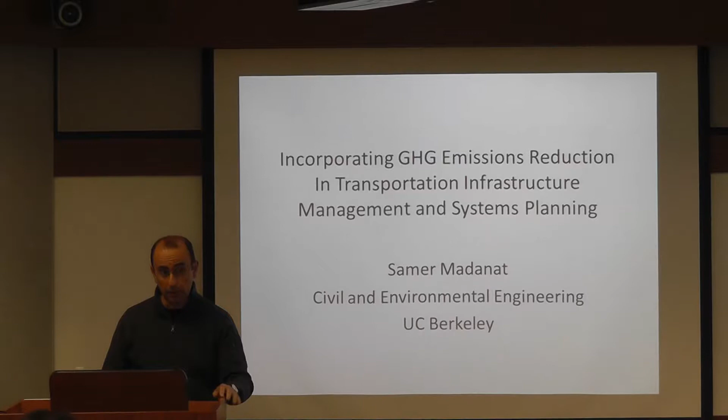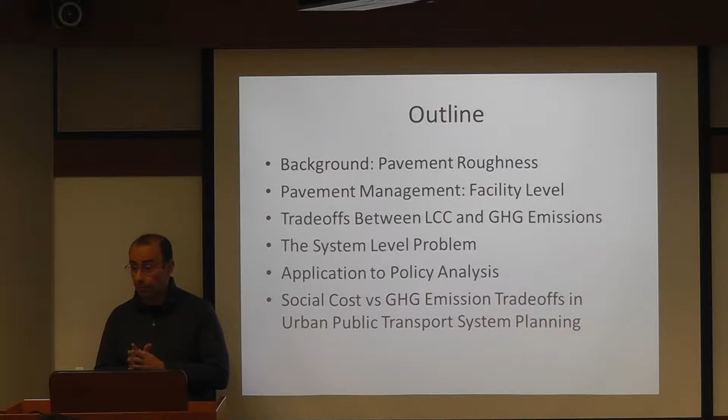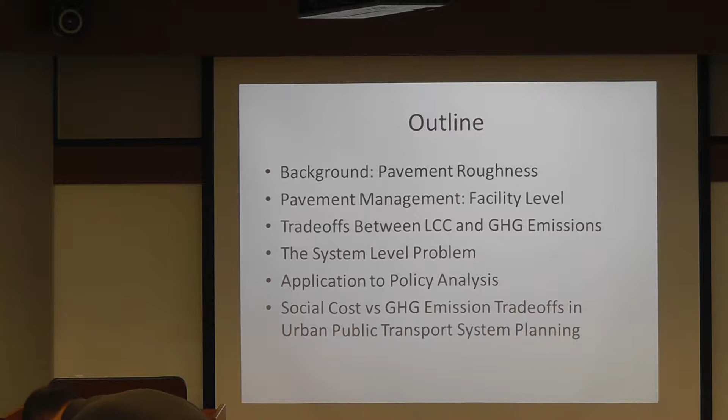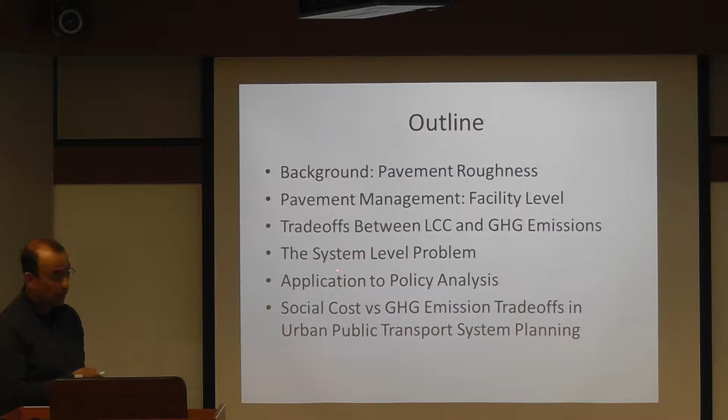This is research, first of all, that is with several co-authors. It's a series of dissertations and journal papers. The focus of the first part is on the incorporation of greenhouse gas emission reduction objectives in the context of pavement management, and specifically reducing pavement roughness. So I'll talk about this first at the conceptual level. I'll introduce the simple problem, which is at the facility level. And then I'll introduce the more realistic problem, which is at the system level, to discuss how this framework and methodology we've developed can be used for policy analysis. And then, if I have time, I'll show the equivalent problem in the planning of urban public transportation systems.

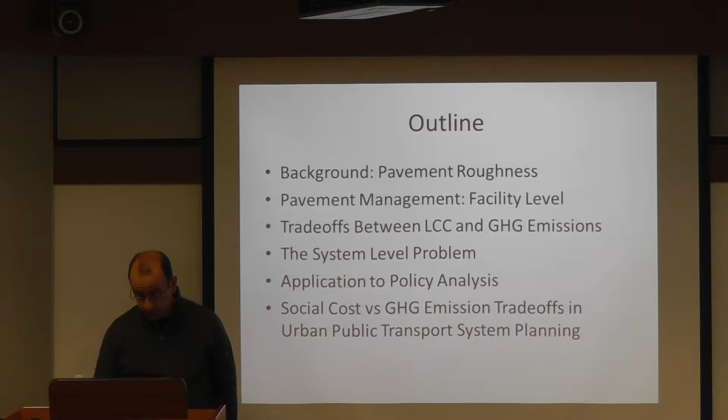So the motivation. I think this is an audience that knows a lot about concerns about greenhouse gas emissions. California is at the forefront of the states in this country in trying to take very serious steps toward reducing its greenhouse gas emissions. We've had over the past decade the California Assembly Bill 32, which calls for reducing greenhouse gas emissions in California by 2020 back to its 1990 levels. And the governor issued an executive order to take that law and expedite it.

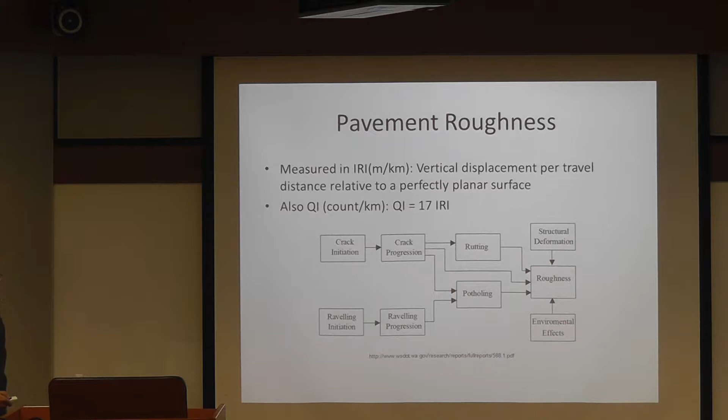Now, roughness is also very important because it is a major driver of vehicle operating costs. By this we mean both wear and tear of vehicles and fuel consumption. So for most state agencies in the US and many countries, what they use to drive their pavement management is often the increase in roughness.

And so in a very simplistic type of pavement management system, you have two possible alternatives. Doing nothing, which leads to an increase in rolling resistance, fuel economy goes down, wear and tear goes up, and also, importantly, greenhouse gas emissions go up because of the decrease in fuel economy. These are some of the papers based on which we have developed models that we'll be using in this presentation.

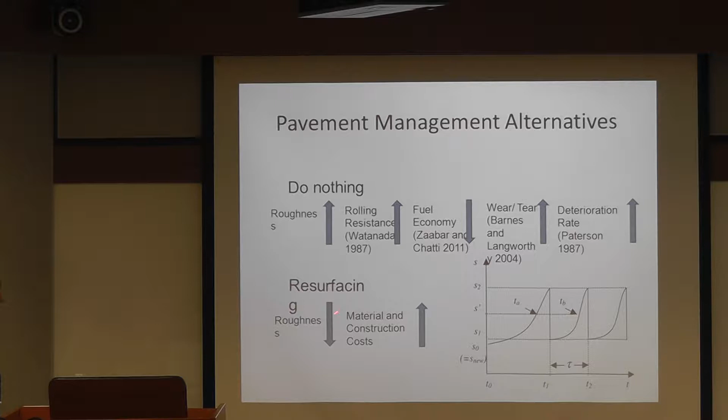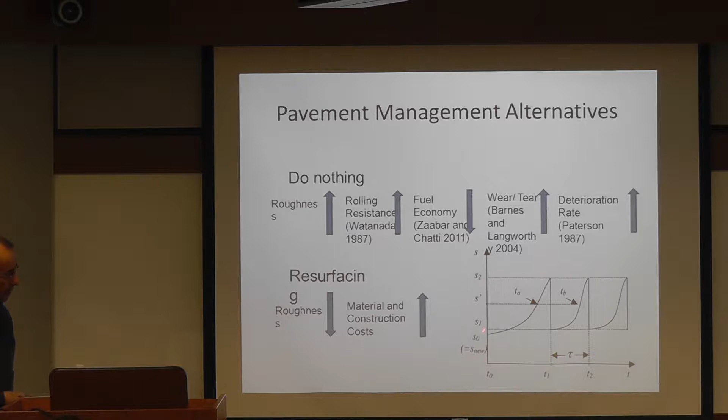If you do resurfacing, roughness goes down, but of course you have an increase in material and construction costs associated with resurfacing. So typically, the succession of roughness progression and resurfacing actions leads to something like a sawtooth curve, which is typical of roughness progression on a typical highway pavement, where T is the time axis and S is roughness as measured by IRI.

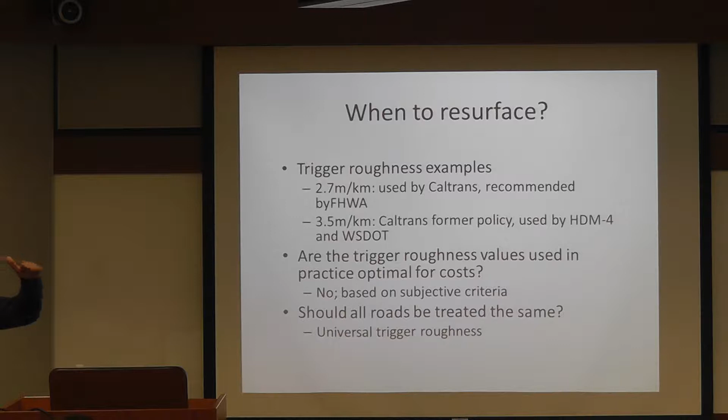The question, of course, therefore, is when to resurface. At which point should we resurface? And most state highway agencies use something that they call the trigger roughness. So that's the point at which, when roughness reaches it, a resurfacing action is applied. In California, that happens to be 2.7 meters per kilometer. Formerly, they used a trigger roughness of 3.5 meters per kilometer. They abandoned it less than a decade ago.

The Washington State DOT, which is another DOT for which we have a lot of data and we've collaborated with, uses 3.5 meters per kilometer. So there are two questions here that one needs to ask. Are these roughness values optimal? Do they represent an optimal trade-off between user cost and agency cost? And the answer is no. They're typically determined on the basis of subjective criteria. Kind of a panel of experts sitting around the room and deciding that this is a good number.

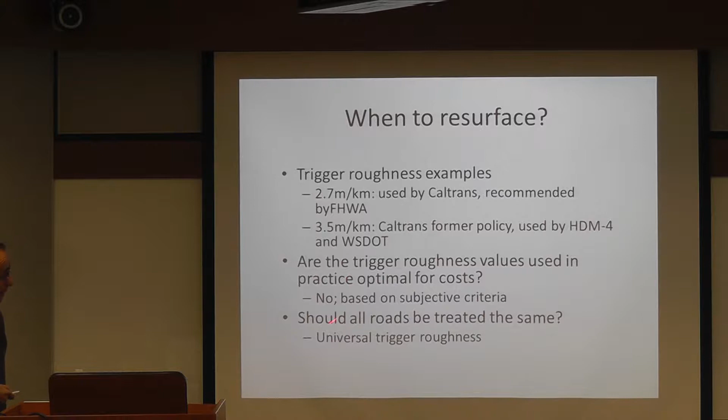The other question is, should you have a single universal trigger roughness for all the pavement segments in your jurisdiction, for example, in the whole state of California? And that is a question worth asking and seeing whether this actually makes sense.

So our research objectives here are to develop the framework for optimizing roadway pavement maintenance, specifically overlays, resurfacing, that would take into account both costs, meaning life cycle costs, including user and agency, and greenhouse gas emissions, coming from both the users and the agency, both at the facility and system levels, and then to use that to do some policy analysis.

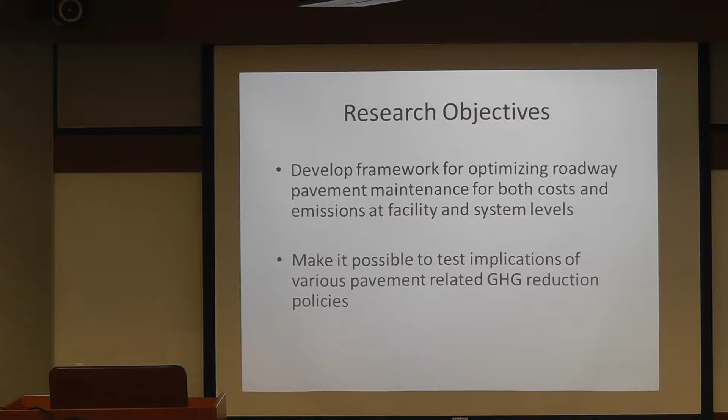So some limitations: to keep this research manageable, and also in view of the limitations of data and models that we have, we're only considering asphalt pavements and overlays. We're not looking at rigid pavements, concrete pavements with overlays. We're excluding minor pavement maintenance activities. These are much smaller in terms of both costs and emissions relative to resurfacing the pavement. We're not looking at end-of-life considerations.

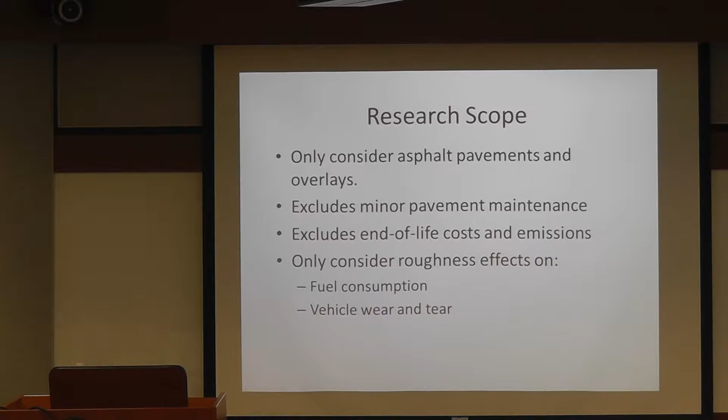And though roughness may have impacts other than fuel consumption and wear and tear, for example, damage to goods, California being an agricultural state, and much of this produce being transported by trucks, obviously rougher roads can lead to situations where you end up with tomato paste instead of tomatoes by the end of the trip and other things like that. We're not looking at that.

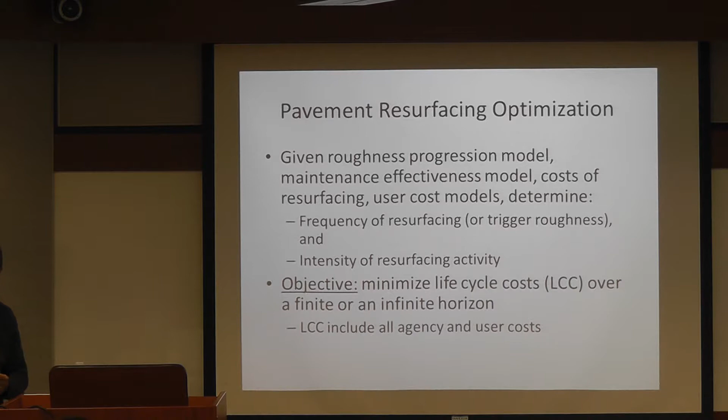The problem is this, so you're interested in determining the S2 here, and S2 could be time varying or could be constant in steady state conditions, and which is the same as determining the time period between this resurfacing and the one before it.

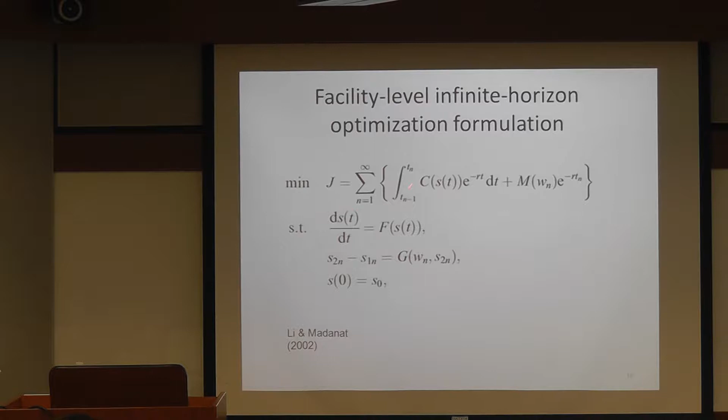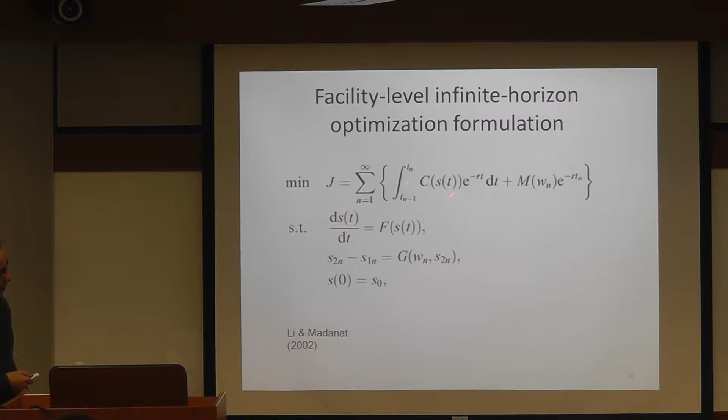So the problem is a formal nonlinear optimization problem where we have the entire life cycle cost. So this is for an infinite planning horizon for a series of cycles, and in each cycle there's a cost associated with the overlay and a cost associated with the users as well. And this is the users rather, and this is the overlay. There's a deterioration function that describes how roughness progresses, some initial conditions and boundary conditions, and

for an infinite planning horizon, not surprisingly, you eventually reach steady state conditions, which means that you have to solve for a single S2. So that kind of trigger policy, which is used by state agencies, turns out to be logical. What state agencies typically will do is they will apply a trigger, except that that trigger is subjective, and whenever they overlay to the maximum possible reduction in roughness.

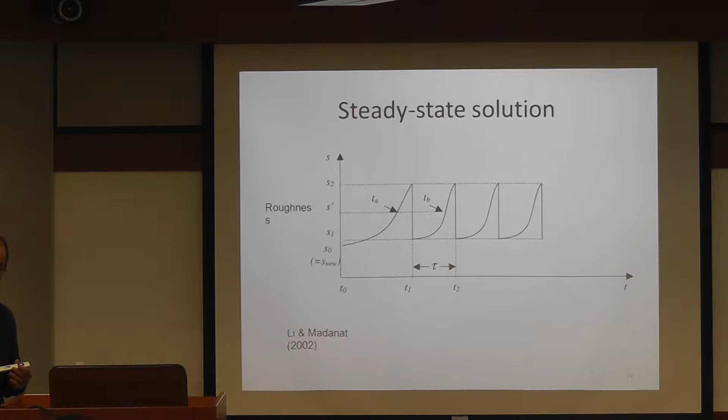So there's a technological upper limit on the size of that drop, because an overlay cannot bring a pavement to as-new conditions. But they apply resurfacing to the maximum possible extent of reduction. I'll skip over this. So we get basically two insights from solving this infinite horizon problem.

The first, which I just described, the optimal strategy is to resurface with fixed intensity whenever pavement condition reaches a specific threshold. And it turns out that this solution is quite robust to deterioration model uncertainty. So solving the problem like I did here deterministically is fine for this particular problem, because you can be off in your prediction by up to 20 or 25% with less than a 5% impact on the optimal solution in terms of cost.

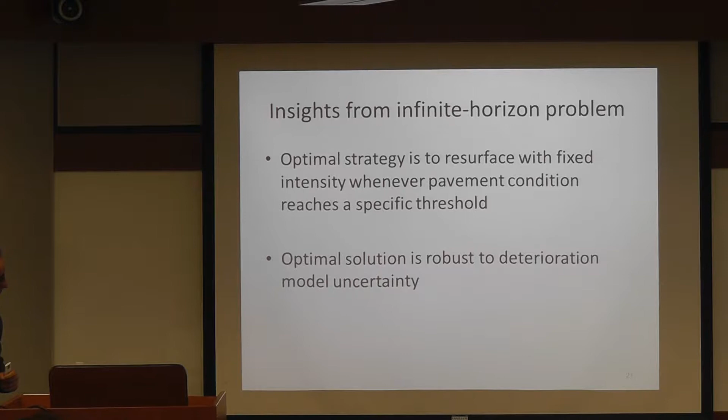There's also an equivalent where we solve the problem for finite planning horizon, and this is described in this paper. And we find essentially the same thing, that we do obtain steady state solution except near the end and the beginning of the planning horizon. And it's always the same kind of trigger roughness policy, the threshold policy here, that says that whenever you reach a trigger roughness, you should do the maximum possible reduction in intensity.

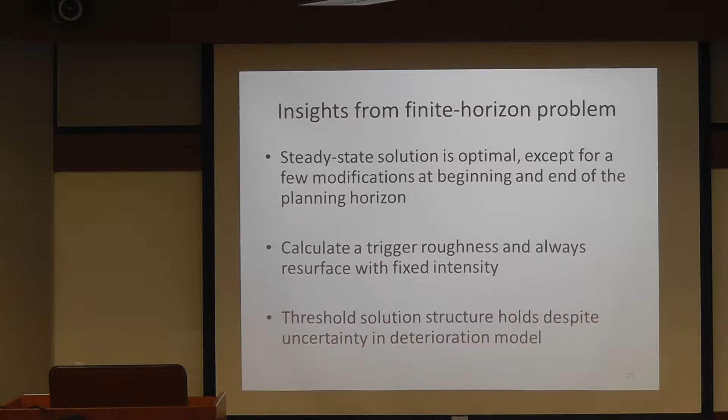So this is called a threshold policy in dynamic programming and optimal control, and this is really what we have. Again, fairly robust to deterioration model uncertainty. All right, so that's what we did in the context of minimizing life cycle cost.

Now let's bring in emissions into the picture. So in the case of emissions, just like that of life cycle cost, there is a trade-off between what happens on the agency side and what happens on the user side. So if we look at overlay intervals here on the x-axis, and CO2 emissions per mile in kilogram per year. As you increase the overlay intervals, the roughness emissions are going to increase. That is, those coming from the users, and that's obvious. Your pavements are rougher for longer, and therefore your vehicle fuel consumption increases and your CO2 emissions increase.

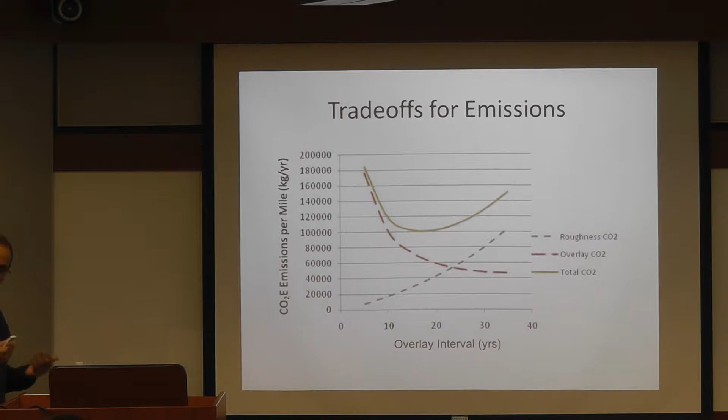On the other hand, obviously, the overlay CO2 are going to decrease. They decrease because you're doing fewer overlays and therefore there are fewer materials and construction emissions. And so if you look at the total emissions, somewhere there's a sweet spot where, for that particular example here, comes to about 17 years, it looks like, where your total emissions are minimized, right? Now note, though I didn't show a picture for life cycle costs, it's the same thing. If your overlay interval increases, the user cost will go up and the agency cost will go down. So it's the same concept that we have in the case of cost.

The difference, of course, is that these optimals don't necessarily coincide. They don't fall at the same value of the overlay interval. So if we have here on the x-axis the overlay interval, we have CO2 emissions on the left, costs on the right. If we look first at the pink curve, this is kind of like the green curve I showed before. This is the total CO2 emissions. This is the total cost, life cycle cost. So we see that in this particular case, for this particular pavement, the optimal overlay interval from the point of view of emissions is around 15 years. To minimize life cycle cost, the optimal value is 30.

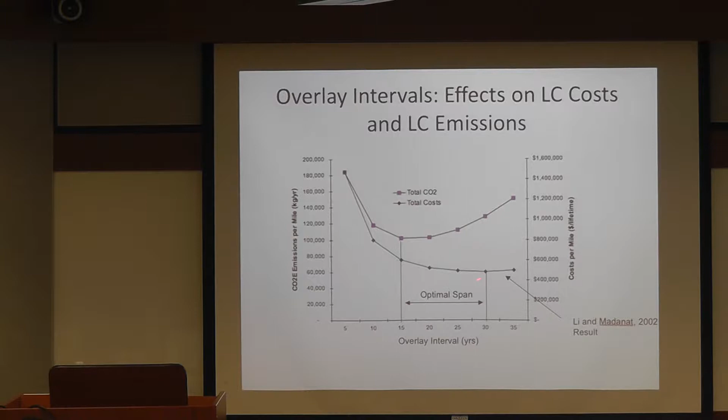So obviously being to the left of 15 makes no sense because both things increase as you move to the left of 15. And if you move to the right of 30, both curves increase. But you have a span in the middle where it's possible to reduce one at the expense of the other. So we call this an optimal span. And this is the span of interest. This is where the trade-offs exist between cost and emissions.

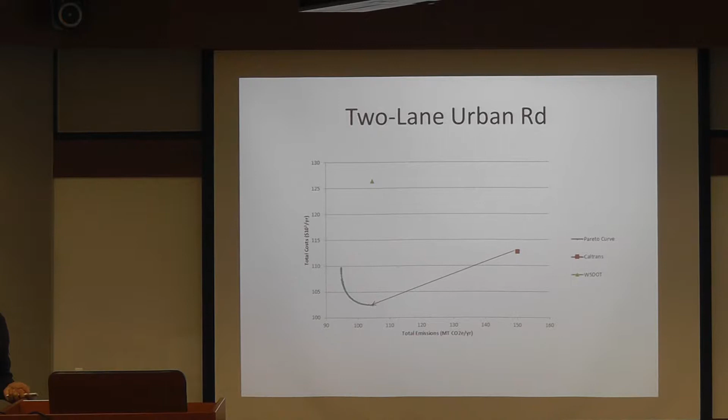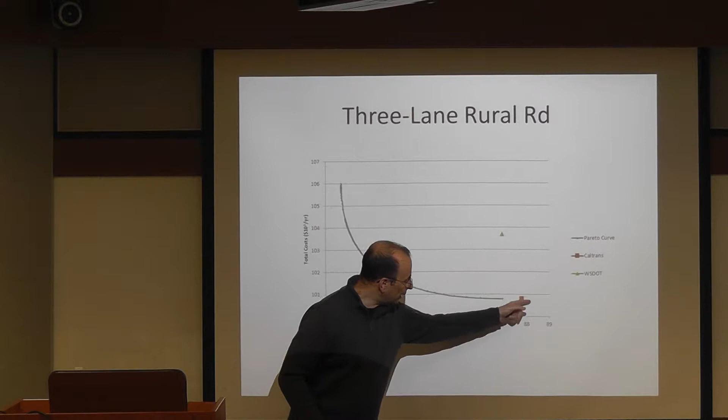The three-lane rural road shown here, again, the Caltrans policy is practically on the Pareto curve. I mean, if you extend this, so after that blue line becomes horizontal, right? That is, the constraint on emissions stops being binding, right? So it becomes horizontal. So you can see that the Caltrans policy for rural roads actually works out quite well.

It doesn't work very well on urban roads. Again, same picture here, with big potential for reducing emissions. So this is for specific roads. This is not the problem that Caltrans solves. It doesn't solve maintenance policies for one road at a time. It needs to allocate its budget, a fixed financial budget, across an entire network of highway pavements. And so what we're going to look at here is first the solution for the system level optimization, and then we'll again introduce greenhouse gas emissions.

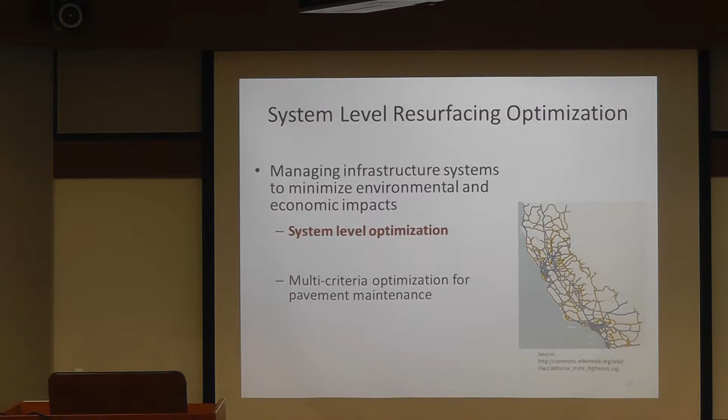So rather than fill the screen with mathematical formulations, I want to first try to explain conceptually how we solve this problem at the system level. Right? So what we do is what is called a bottom-up solution. So we start by solving optimal solutions for individual pavements. All right? And then when we impose a budget constraint, we modify these optimal solutions by effectively changing the optimal threshold. That's kind of a caricature of the solution. And it's a resource allocation problem.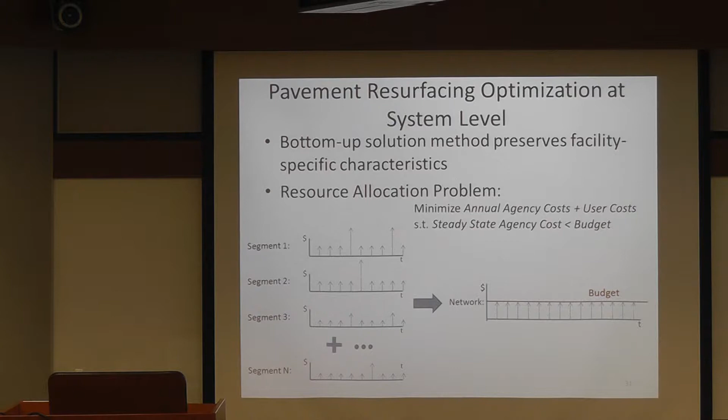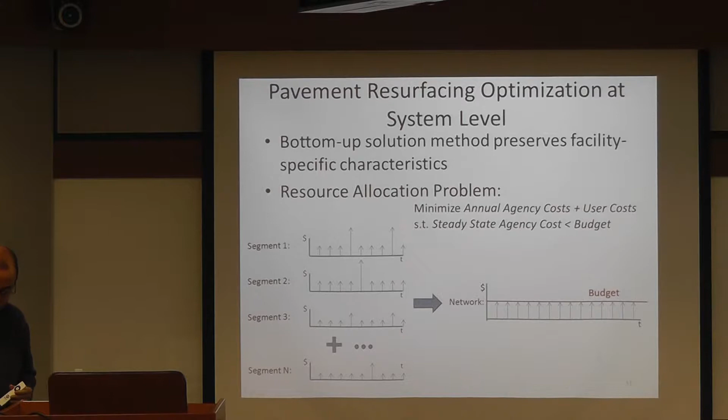The problem, of course, is that your budget is never going to be high enough to do everything you want to do in most years. So because the budget is lower, you're going to have to modify your thresholds here in such a way that in the steady state you're using the whole budget, but nothing more. So I won't show the math formulation, but it's described in this paper, Sathaye and Madanat. And this is what we get for several hundred pavement segments in District 4, so it's a representative sample of the problem that Caltrans districts have to solve.

So what am I showing here? I'm showing on the x-axis the budget per year and the trigger roughness on the y-axis. Then the different colors here of the different densities are in fact a representation of the number of pavement segments which have, at a given level of budget, that particular optimal trigger roughness. So dark regions mean that there's nothing there, no pavement segments in that region. And the light ones mean there are many. So you can think of these as probability density functions. Take a cut like this at, for example, 30, and you look at it, this is like a PDF of the pavement segments distribution, right?

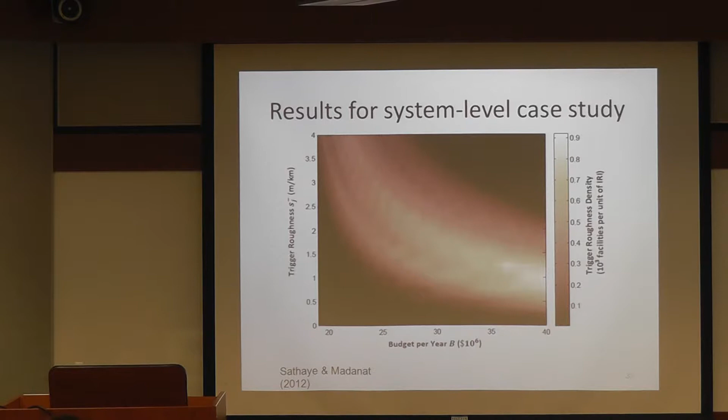And here's what we see. Well, the first thing we see, which is kind of obvious, doesn't take research to do, is as we increase the budget, we can do many more resurfacings at the optimal time. In fact, on average, all the trigger roughnesses are going to go down. But the other important thing, which is very critical, is that this is not a line, it's an entire PDF. So the policy that most state DOTs, in fact all state DOTs that I know of, and most countries have, which is to use one trigger roughness for all their pavements, is really not a good idea, right?

You can see that, taking for example this particular budget, the distribution of trigger roughnesses goes everywhere from 1 IRI to 3.5 IRI. So this is a very big range of trigger roughnesses. And using just a single one, let's say 2.7, which is what Caltrans uses now, 2.7 somewhere here, as a trigger roughness for all their pavement segments clearly doesn't make sense.

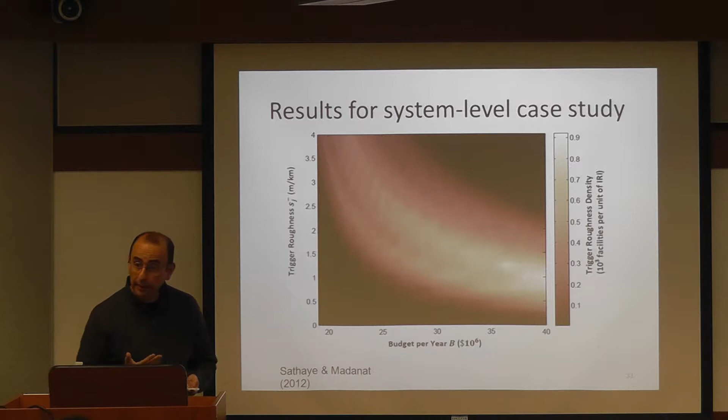So that's what I just said, written again for emphasis. And then, again, though I'm not showing this, the optimal solution turns out to be quite robust to deterioration model uncertainty, that is, the roughness progression model.

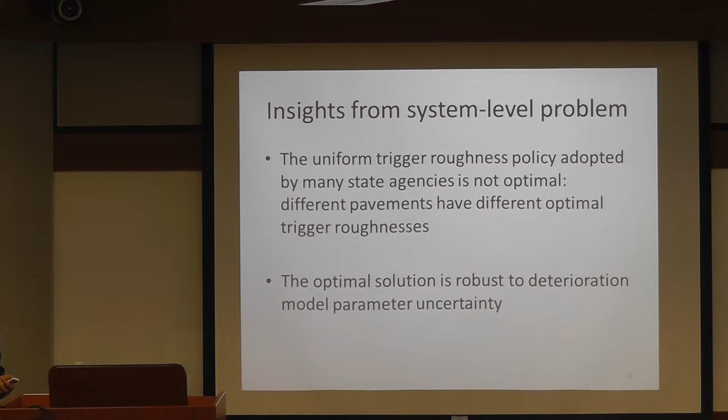So now let's bring life cycle emissions into the picture. And there are two ways of thinking about this problem. One of them corresponds more to the situation in California, where the state has told agencies they need to be at a particular budget of greenhouse gas emissions. And so Caltrans has, as a result, to meet a certain target, right?

So this is Caltrans District 4, not the entire district, but the representative pavement sample. And again, the picture doesn't look good at all for Caltrans. This is the Pareto curve, and we had to shrink it just so that we could show where the current Caltrans policy falls relative to it, as well as the previous Caltrans policy. But at the very least, there's progress. There's significant progress moving from here to here.

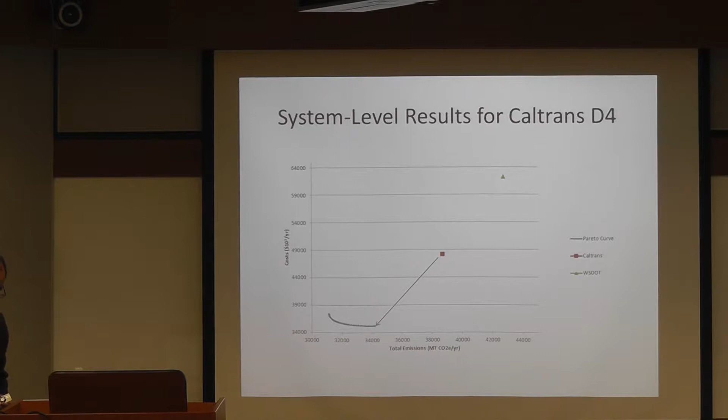Now, those of you who are familiar with Pareto frontiers have probably already deduced, or must be asking, can't we use this to come up with an estimate of the carbon price that a certain state or country uses? Obviously, the slope of the Pareto frontier at any point is the price of carbon at that point. So different points represent different trigger roughnesses, right?

And so if you decide that this is the point on the Pareto frontier where you want to operate and have a certain trigger roughness associated with that, or distribution of trigger roughnesses, then the price of carbon is the slope. And that's obvious because the units of the slope of the tangent are dollars per metric ton of carbon, which is the price of carbon, right?

So, California has started doing carbon auctions, and the price that they obtained in the last carbon auction was, I believe, close to $10 per metric ton of carbon. And so that would be here. So according to that, for that particular price, Caltrans should be on this point on the Pareto frontier, and that would then dictate the trigger roughnesses and the time period between resurfacing.

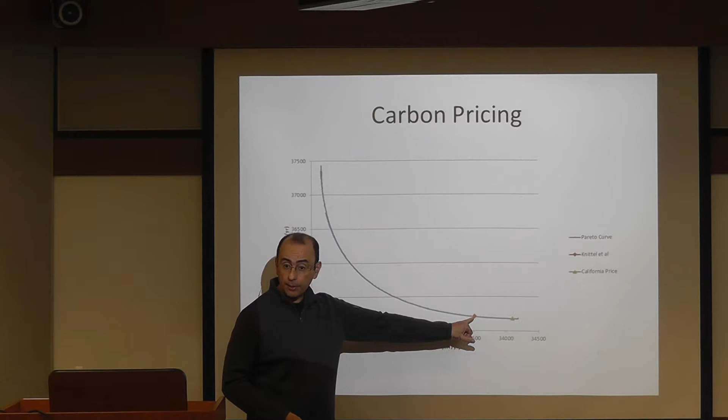A study by Knittel and others came up with a different approach to the price of carbon, which in their opinion should be closer to 100. So 100 would still be very much towards the left of that Pareto curve. That would be like a market price, if you will, in the case of Caltrans, California. If on the other hand society decided that this is more what it's willing to pay for reduction of 1 metric ton, then it would impose it here, and this is where to operate.

Now the other things we can do: Caltrans uses different practices for resurfacing. One of them is to resurface all the lanes on a highway when the rightmost lane, which carries the most trucks, reaches a roughness of 2.7 meter per kilometer. And these are the results I showed before.

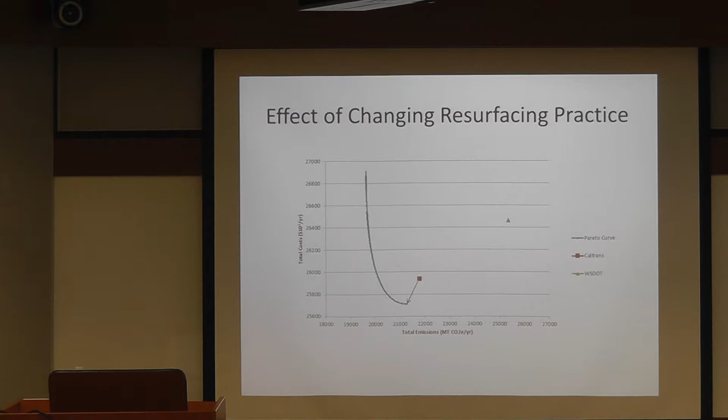If through technological improvements we could make the application of overlays lead to a lower roughness, for example, we've looked at a case, there's a curve missing here. But in any case, if we just show these two, you see that if you're able to reduce roughness more as a result of the application of overlay, your entire Pareto frontier shifts towards the left, which has both cost and emissions implications.

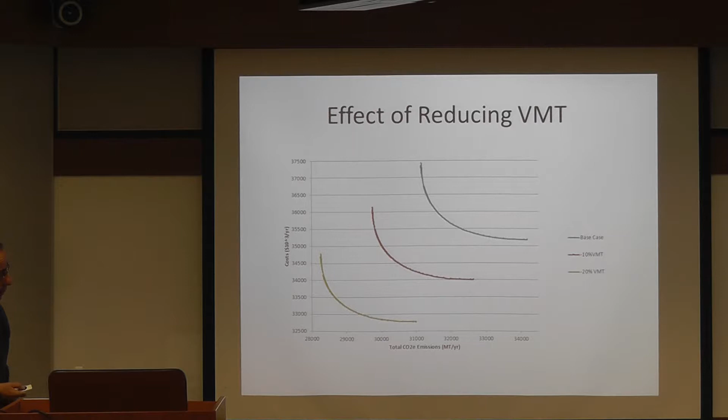VMT, obviously, you reduce vehicle miles traveled. As a result, your Pareto frontier also moves to the left. So this is the base case. This is a 20% reduction in VMT. There are very significant reductions both in greenhouse gas and cost for any point on the Pareto frontier.

So let me see if I'm going to present this. I'm supposed to end at 3. Yeah, we can. No, maybe I'll skip this and kind of show you.

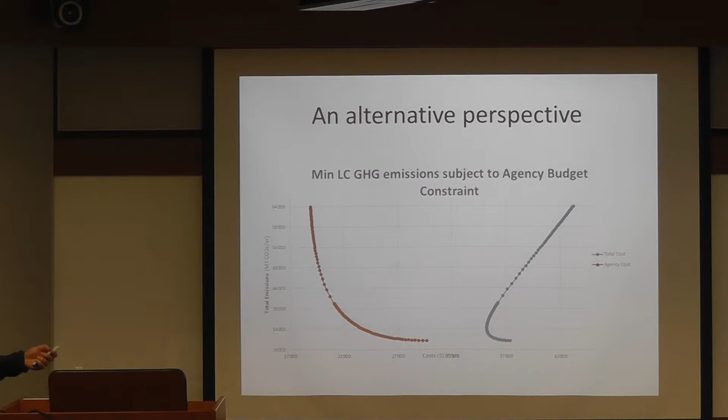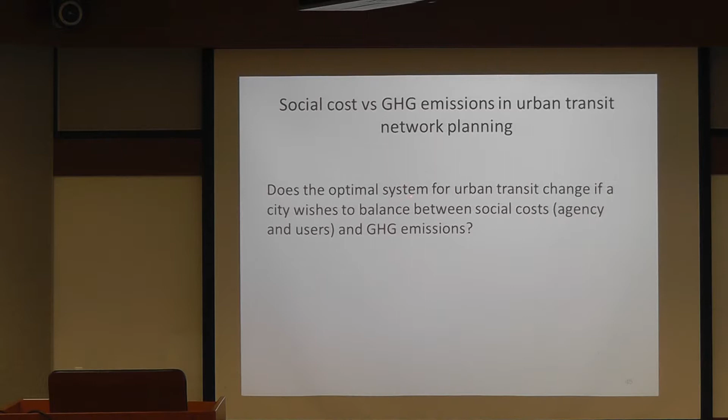Now, in order to frame the question, it's going to be this: if a city were now to design an urban public transport network using the objectives that cities currently have, which is some kind of minimization of total societal costs, meaning the travel times and waiting times on the user side, as well as the cost to the agency of operating and maintaining its fleet and its infrastructure, how would their policy change?

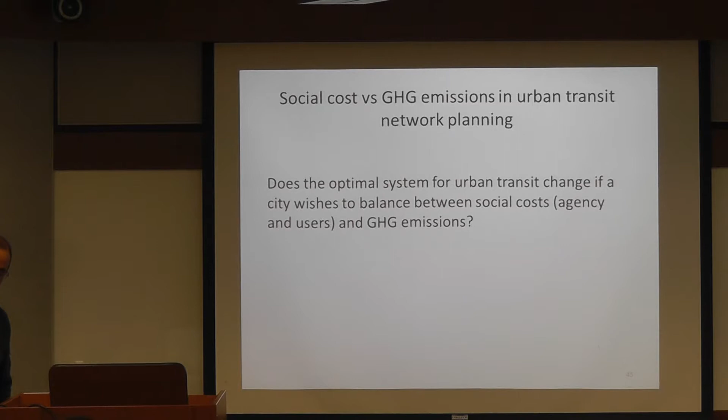So there are many ways that people have tried to solve the optimal network design for an urban public transportation system. Many are very detailed and use some very complex and at times computationally expensive discrete optimization methods. And others are using a continuum approximation method.

The idea of a continuum approximation is you basically assume that your city is a plane, forget about where the streets really are. And you think of your demand as being a density function over that plane instead of specific origin-destination demands. So that's the continuum approximation. This kind of approach is very useful for doing two things.

First of all, you're able to obtain analytical expressions which connect the causes, the design quantities that you're solving for, which are spacing between lines, spacing between stops, frequency of service, and the effect, which are societal costs. So it is no longer a black box optimization, but something very clear, and that clear relation between cause and effect allows you first to explain this to decision makers in a simple way.

And the other thing it does is it allows you to play with the causes, see how the effect comes up, so that you can yourself do a lot of sensitivity analysis. The third thing is that the solution is very quick. You're using basically the tools of calculus, essentially nonlinear cost minimization.

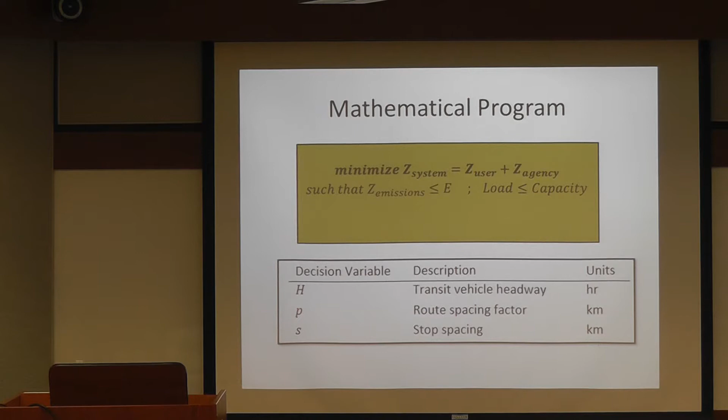These are the three decision variables: headway, route spacing factor, and stop spacing. In effect, the P works with the S to give us the final route spacing. The idea is you have multiples of stop spacings that give you route spacing in the other direction.

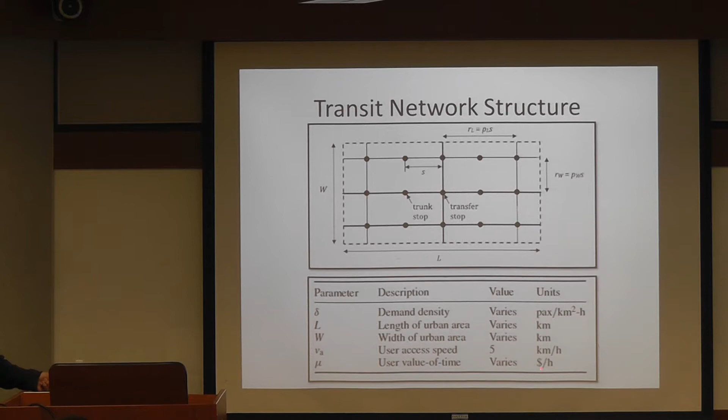Some people have usually used wage rate as a way of obtaining that, but there are a bit more accurate methods. And typically, in reality, you should have more than one user value of time. The value of time is different when you're on the bus rather than waiting by a factor of 2 or 3. So for realism, in the later work, we had 2 or 3 different user values.

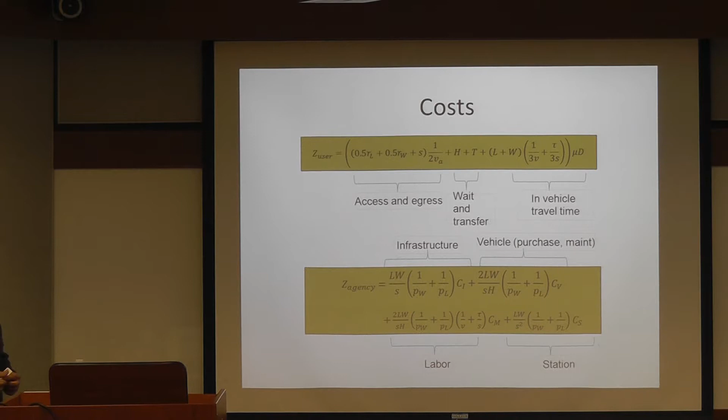All right? And we looked at 4 possible scenarios. We created these synthetic cities, really, toy cities. Some are small, some are large. So we made them square to simplify life even further for ourselves. So they can be 10 by 10 or 40 by 40. The demand density can be low, like 100 passengers per square kilometer per hour, or high, 200. Now notice this is density, we're not differentiating between origin and destination, right?

It's the same thing. The wage rates, it can be a poor city or a richer city, and so that gives us an idea of the value of time. And this factor actually combines mu and delta into a single factor because they can be combined. Now, the technologies we're looking at include everything from buses to bus rapid transit, BRT, light rail transit, and metro. And they have speeds, costs for right-of-way, costs for maintenance, emission factors, etc.

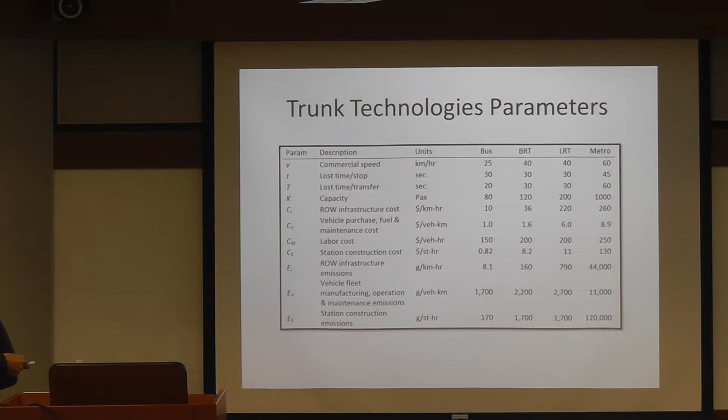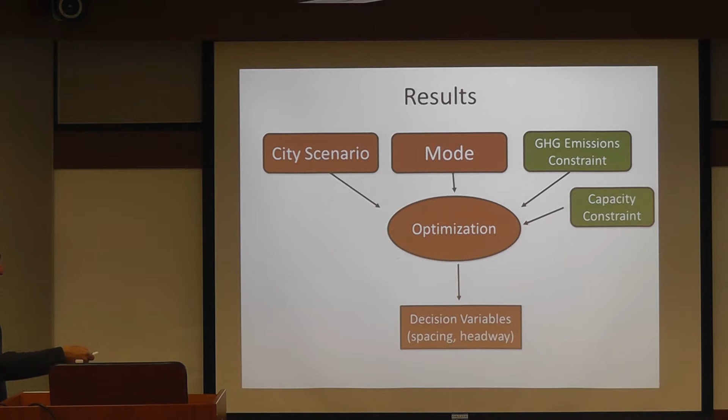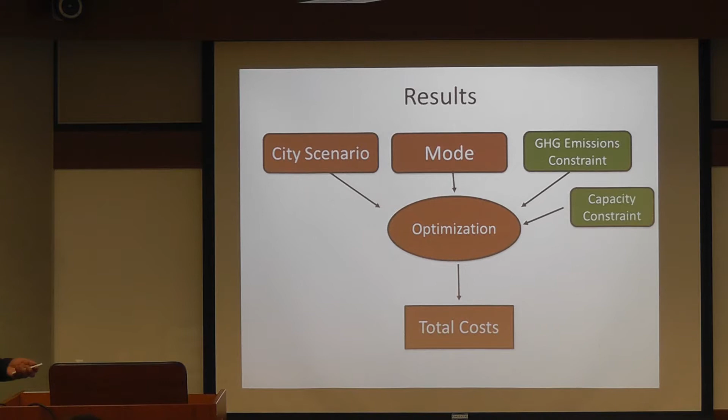So the constraints are the emission constraints and the capacity constraint, bus capacity. And now the problem is posed, right? We have a particular city scenario, particular mode, particular constraints on both greenhouse gas emissions and capacity. We have this nonlinear minimization problem, and we obtain some decision variables, which are the spacing and the headway. And these essentially come from these particular values of total cost.

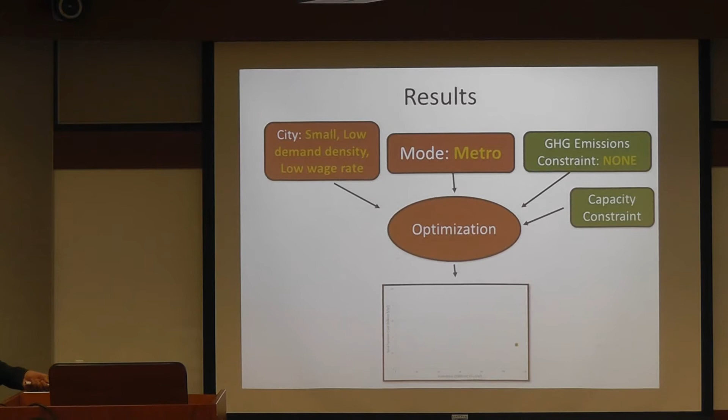So for this city, for this mode, with no constraint, we obtain a point on the Pareto frontier. So again, this is emissions X and cost Y. And this is the point that we get if we don't impose any constraint. Then we repeat that by changing to a particular constraint, a low constraint, we get a new point, and another one, etc. You get the drift, and so we end up with a curve like this.

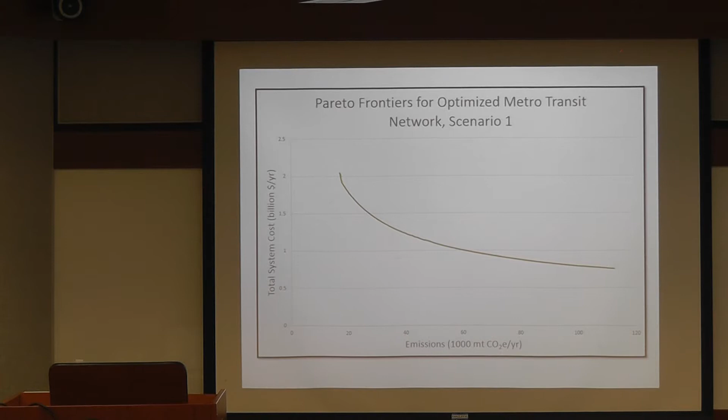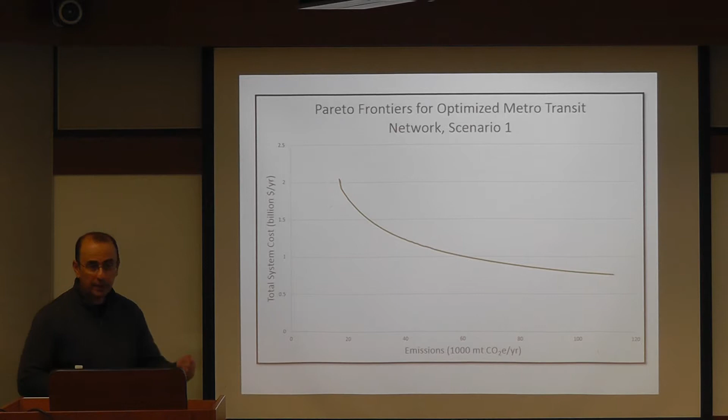Okay. So this is for a particular mode, which is metro here, a particular network, a particular scenario, combination of city size and wage rate and demand density. And so we get this Pareto frontier, and that helps guide us depending on where the city considers the appropriate price of carbon. If it's here, that gives you a particular headway and stop spacing, or station spacing, that it should design eventually. And we can do this for all kinds of cities.

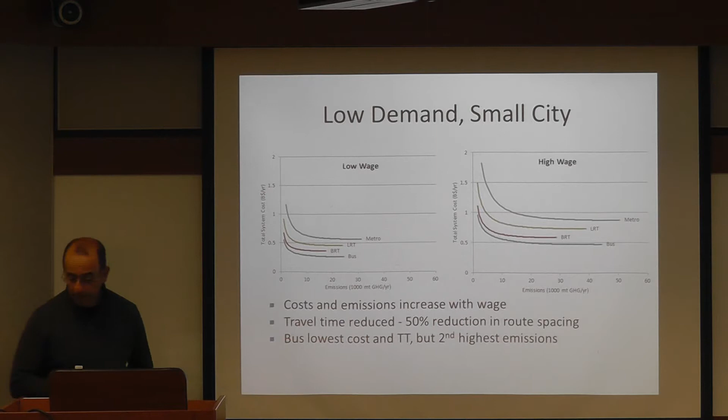So here, low demand, small city, for the 4 modes. And so you see some results that are interesting. For example, yes, bus in a low demand small city has a lower cost, but at its cost optimal point, it produces higher greenhouse gas emissions than BRT, whether it's a low wage city or a high wage city. All right, and then here we increase the demand. Now BRT and bus have almost equal total cost, societal cost, right?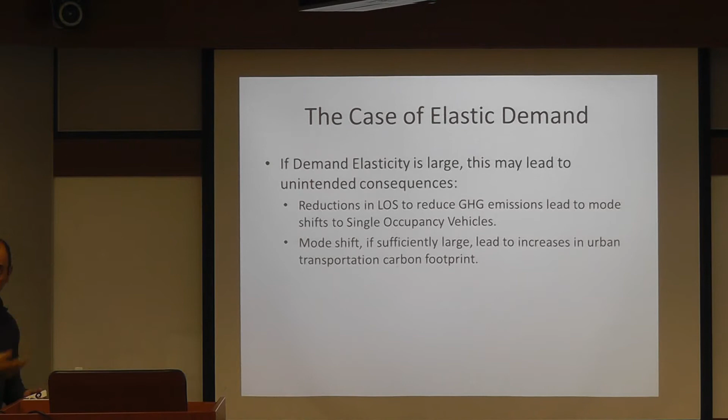There are all kinds of simplifications we've made here, obviously. This is not meant to be something a city would use tomorrow, but it gives insights about the trade-off between these attributes. For example, one thing we assumed here is that demand was inelastic. So we can reduce the level of service by moving to the left here, right? Increasing costs. When you reduce level of service, it's the user costs that go up.

The agency costs actually go down, but the emissions as a whole go down because the emissions in the case of transit are only associated with the agency. I mean, we're not counting the greenhouse gas emissions that individuals may count on their own. So we allocate the entire emissions to the transit, to the bus or the metro.

But if demand elasticity is large, then trying to reduce greenhouse gases by, for example, moving from the cost optimum point in that direction, since we're assuming cities, if they're doing their work right, are going to be close to this point, right? But if they want to reduce greenhouse gas emissions, initially they may reduce the level of service, increase the cost a little bit, and nothing will happen.

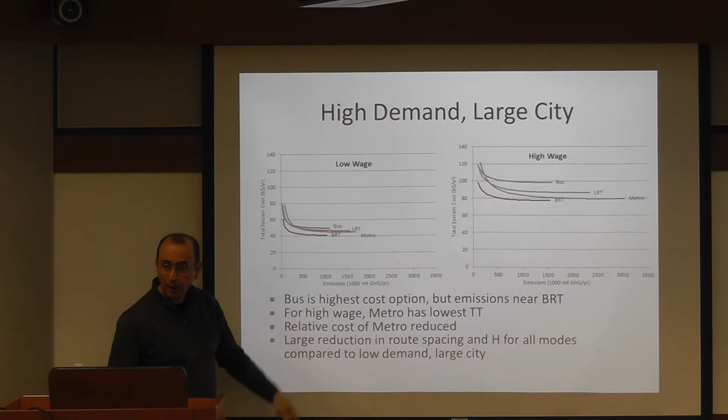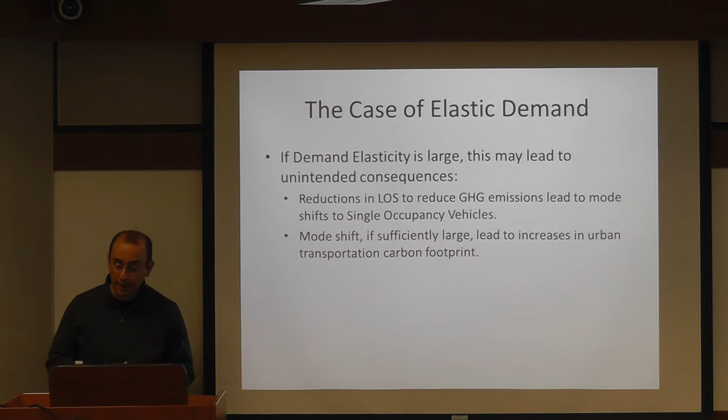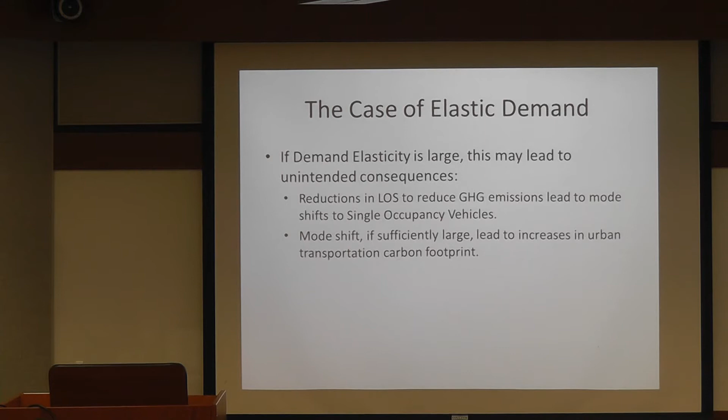But if they go too far, you're going to end up with unintended consequences, that people are going to shift from bus to more polluting modes. So this is something that we need to also be careful about. And this is in fact what we're trying to say, is that if sufficiently large, the mode shift may lead to an increase in the total footprint of the urban area, because people are going to now, we're assuming for simplicity, move to driving alone, right? Therefore, while the transit emissions may go down, the total city emissions will go up. And so we've looked at some of that, and that can in fact happen.

Some limitations: we had the grid network, we had uniform demand density. We didn't take into account a hierarchical trunk feeder system. We're assuming people walk to the stations. So this is partly why metro turned out to be always so high cost, because in high demand cities with high wage rates, right, the metro is expensive, so you typically would want to keep stations as far apart as possible. But if the user costs are high, you want to bring them closer to each other.

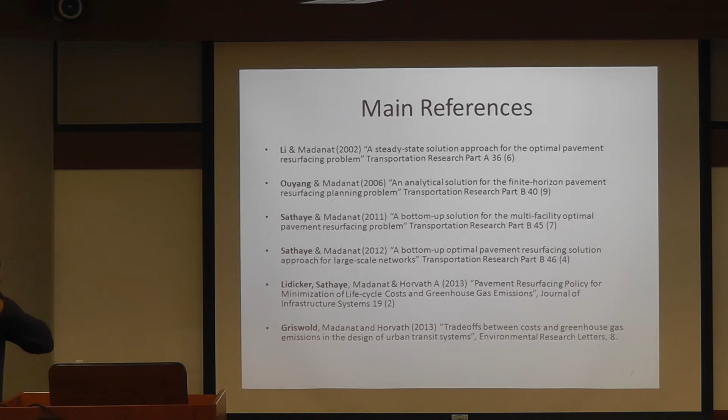Certainly. So, first of all, these slides for transit and many others that I didn't show are published in one paper, which I think I showed earlier. So this paper is in Environmental Research Letters. It's Griswold, Madanat, and Horvath. Griswold was a former PhD student of ours, and Arpad Horvath is a colleague at UC Berkeley who specializes in life cycle accounting and greenhouse gas accounting.

There's a subsequent paper to this one that's under final review that will come out that shows the effect of accounting for elasticity. So a more realistic system, by the same author. For pavements, we have this, and there's actually one that just came out. So the other Griswold paper is also in Environmental Research Letters. So you see what I showed here and much more.

Other questions? So some of the previous studies have shown that pavement performance has an effect on safety. So while considering your cost or finding the trigger IRI value or roughness value, have you considered any of the safety perspective? No, so safety comes into there, there are two effects.

One is skid resistance, right? The skid resistance is at a level that is not captured by the roughness, right? So the microtexture of the pavement surface and how the tires interact with it in situations of braking with or without the presence of water. But that's not included. So anything we're doing here with roughness has in fact no effect on safety.

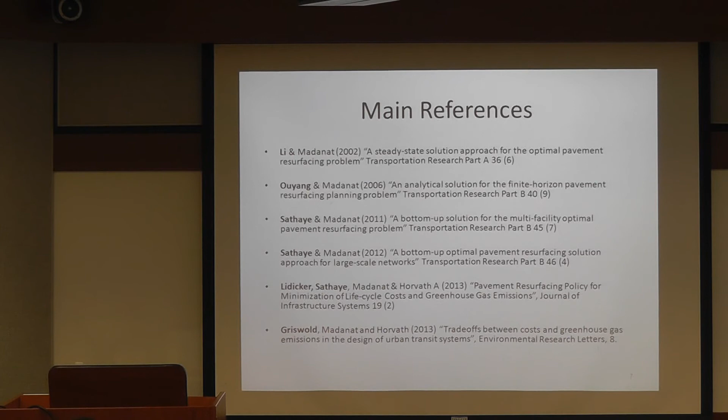So we looked at a model developed by Bill Paterson of the World Bank about 15 years ago or so. That is very realistic in that it accounts for structural number, the thickness of the pavement, the amount of ESALs, equivalent single axle loads, and the effect of environmental considerations, at least precipitation.

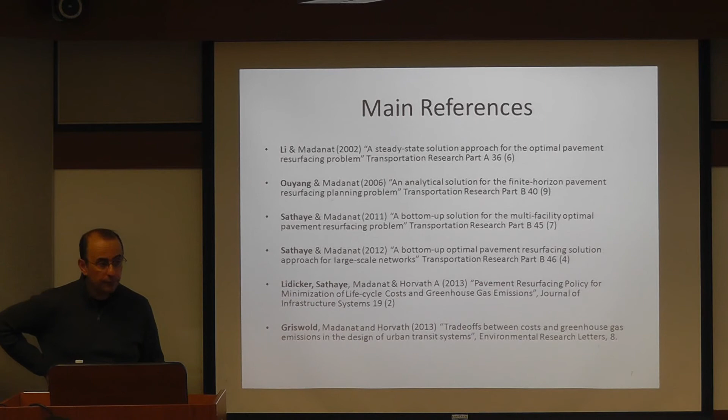So we adapted it, and that's what we use here and also in this paper. Do you consider how much weight you travel on the pavement? Yeah, the ESALs, the equivalent single axle load, which is a unified measure. For those who are not pavement engineers, there's a standard axle load of 80 kilonewtons, 18,000 pounds. And if you have an axle that carries more than that, let's say double that, then you take the weight carried by the axle divided by 80 kilonewtons and raise it to the power of 4, which is kind of the industry accepted practice, and that gives you the effect on the pavement.

Another question. So on the continuum approximation methods, you said that you're basically modeling density of demand. So how do you model the OD? We don't. You don't model OD? No. Essentially, we're saying that demand is uniformly distributed in terms of origins and destinations, and the average trip length is kind of the average of all possible distances in a grid network, right? So you take the maximum in a rectangle, and you take 0, the average is that. And the distribution of trip length is some distribution that comes from the dimensions of the rectangle.

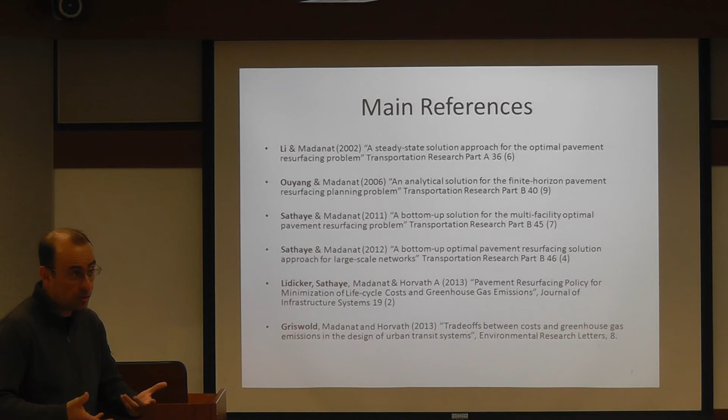So there's no OD representation, and that's the whole advantage of this continuum method: you forget about points and links, and you think of this as a surface. You obtain an optimal solution, and then you map that solution to the actual street network, so you may need to push things a little bit to the right or to the left. And so, as I said, you don't get the truly optimal solution, but you get something that hopefully is not too far. One of the things about continuum approximation methods, which is very powerful, is that the objective function at optimality is fairly flat. So, just like in the pavement example, you can be wrong by 20% in terms of the input, but the optimal solution is robust. It's robust, yeah. We didn't invent continuum methods. These are described very well in the book by Daganzo on logistics. So that's a good way of learning about that.

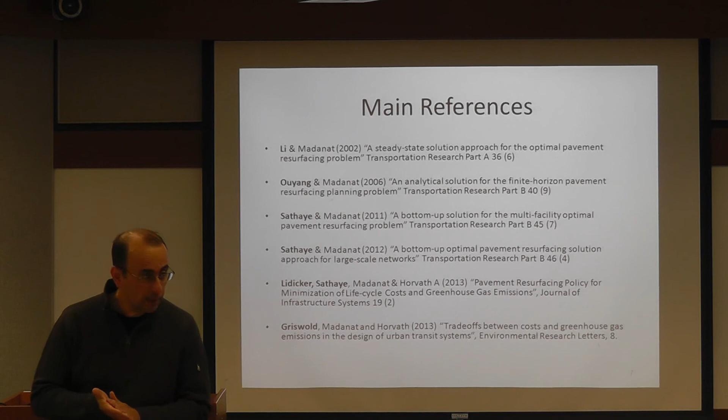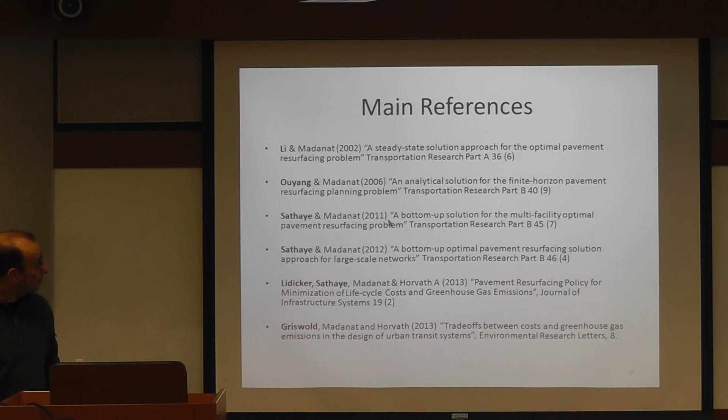I was just wondering, what is the typical impact of pavement conditions, such as roughness, on greenhouse gas emissions produced by vehicles? Do you have some kind of value range to give us an idea? Yeah. So the input into that is the percentage increase per unit of IRI. And I'm ashamed to say I don't remember the precise number, but you see that reference, Santero and Horvath, 2010. I'm not sure which journal, I think it is ES&T, Environmental Science and Technology. It has a description of the effect of each of these on greenhouse gas emissions per unit, rather than just these total quantities. So instead of trying to remember, I think it's best that I point you in the right direction.

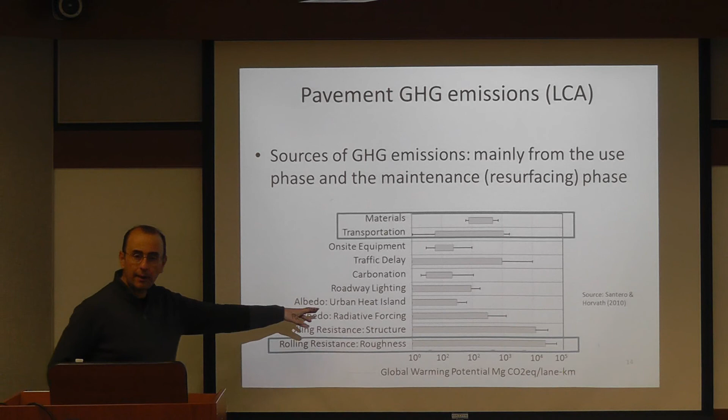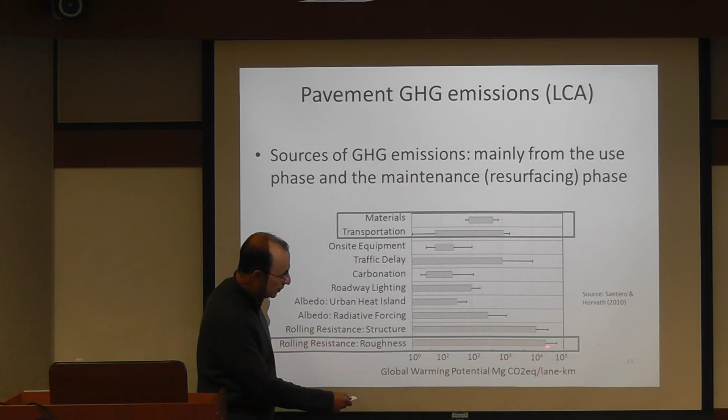But it's significant in the sense that roughness is the biggest contributor to greenhouse gas emissions, right? So it's a very big deal if you're interested in having an impact through maintenance, through road condition, on roughness. There's albedo and stuff, but they're nothing compared. Notice this is a logarithmic scale. I forgot to emphasize this. If you compare that to albedo, it's about 100 times more important. Are there any other questions?

In your first portion, you mentioned that you considered only asphalt overlays on asphalt pavement. Is there any reason for selecting only this one? Well, the other solution is asphalt overlays on concrete pavement, right? We have much better models of roughness progression for asphalt than we have for concrete. For concrete, neither the literature nor our own research has produced anything really solid enough. Whereas for asphalt, there are, as I described earlier, several models, including Paterson's work.

I also did some work with Jorge Prozzi, whom Panos mentioned earlier, who's now in Texas. Our model turned out to be too complicated, requiring too many inputs to be used in this research. So that's the system of seemingly unrelated regression equations? No, this is the one where we developed a roughness model by combining experimental and field data. Oh, all right. So that's back in 2003, yeah, 2007.